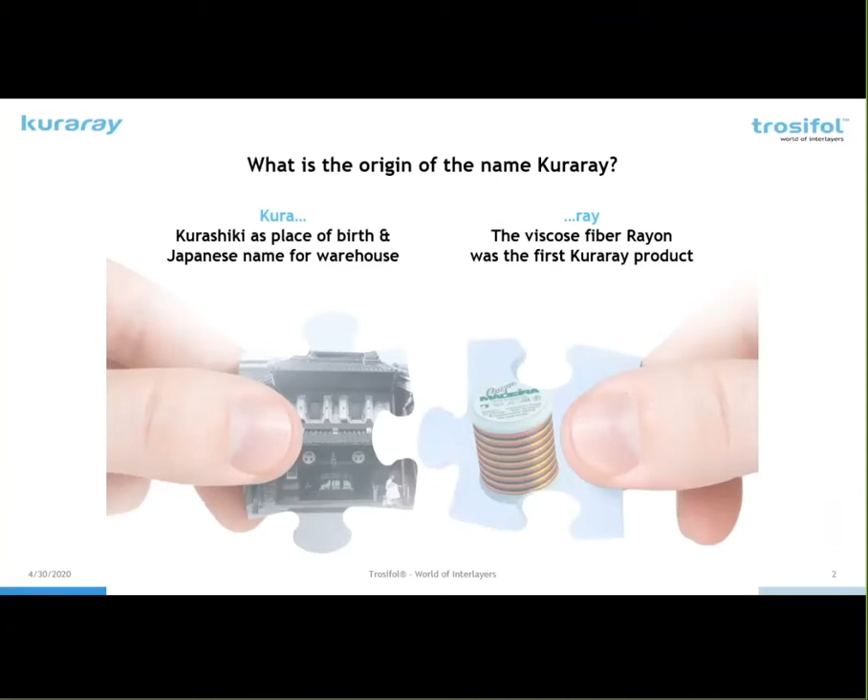So before we get into the part about the glass and the interlayers, let's talk about Kuraray itself, because a lot of people are not familiar with the company Kuraray. The company was founded in 1926 in Japan, and the origin of the name, the first four letters, the Kura, comes from Kurashiki, which is the area in Japan where the company was founded. The last three letters, Ray, that's for rayon, which came from the first product that Kuraray manufactured. So you put them together, you get Kuraray.

So Trosifol is the Kuraray interlayer business, and you can see how it evolved over time. Kuraray in 2004 bought the HT Troplast business, and that started their venture into interlayers, and that was their PVB business, and that's where the Trosifol name comes from. In 2014, so next month it's going to be 6 years, Kuraray purchased the DuPont GLS and vinyls business.

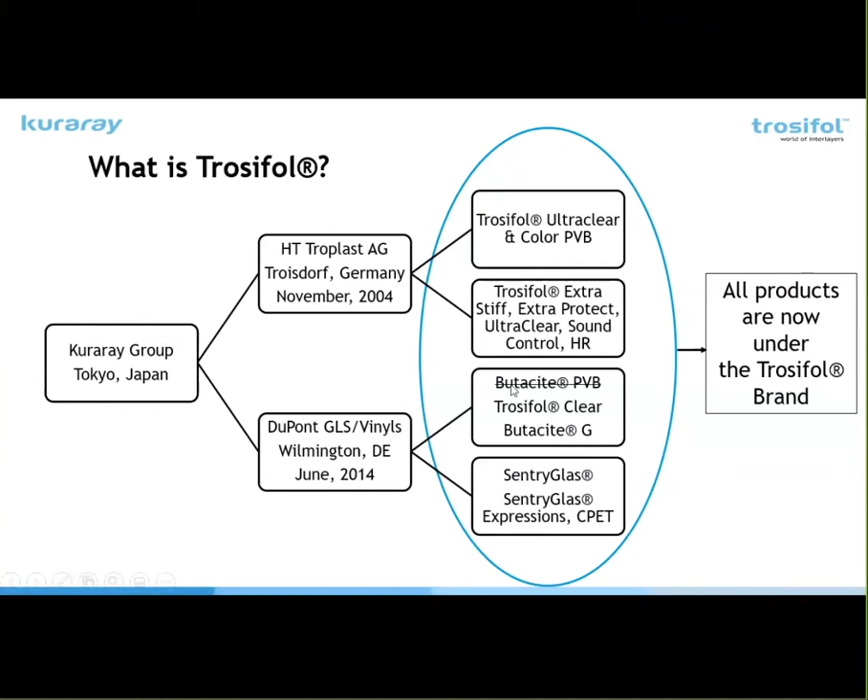And along with that came products such as Butacite PVB, as well as SentryGlas and SentryGlas Expressions, and the whole portfolio of the interlayers from DuPont. So now the whole thing is combined, and it's all under our Trosifol brand of products. The brand names are still the same. I have crossed out the Butacite because our PVB portfolio is now all called Trosifol.

So there are several applications that we'll be talking about today where laminated glass is used. First of all, we'll talk about some overhead applications such as canopies and skylights. You need laminated glass to reduce the risk of falling glass as well as fall through. Guardrails. Guardrails is a big topic these days as the codes have changed, and we'll spend a little bit of time on what's going on with the codes and standards for guardrails.

Security, both man-made and natural threats. We'll talk about natural threats through this presentation, and then at the end there's a little addendum where we'll get more into forced entry and man-made threats. Comfort, and in talking about comfort, I am referring to acoustics, so we'll talk about that. And then finally, aesthetics and durability. This would be some colors and printing on interlayer and edge stability concerns that may come up.

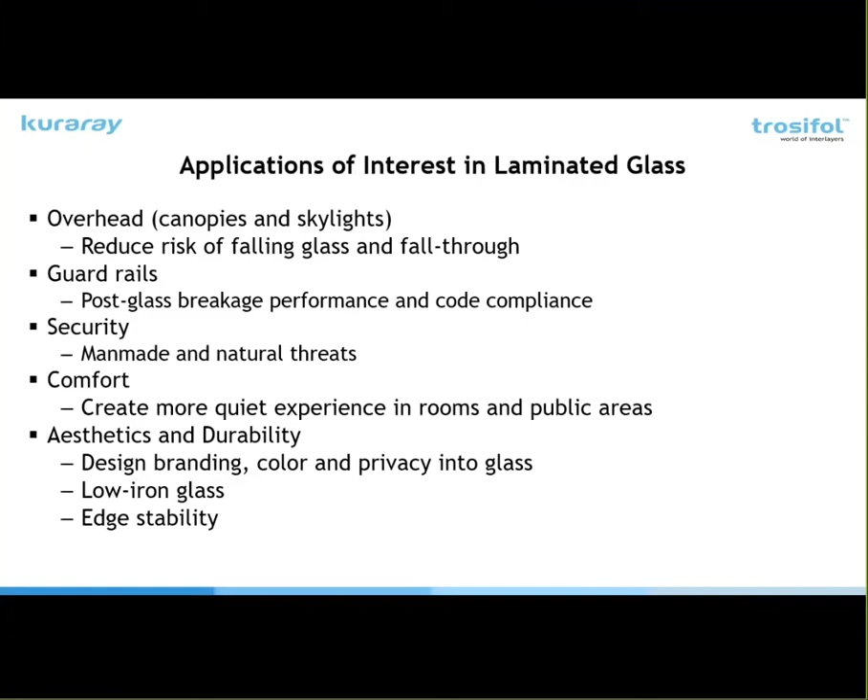So as far as laminated glass, I'm sure most of you know what laminated glass is, when you have at least two pieces of glass and at least one interlayer. The interlayer is there to retain the glass if breakage occurs. The types of laminated glass I'm going to talk about today are those made with PVB, or polyvinyl butyral, and ionoplast, which is the generic term for SentryGlas.

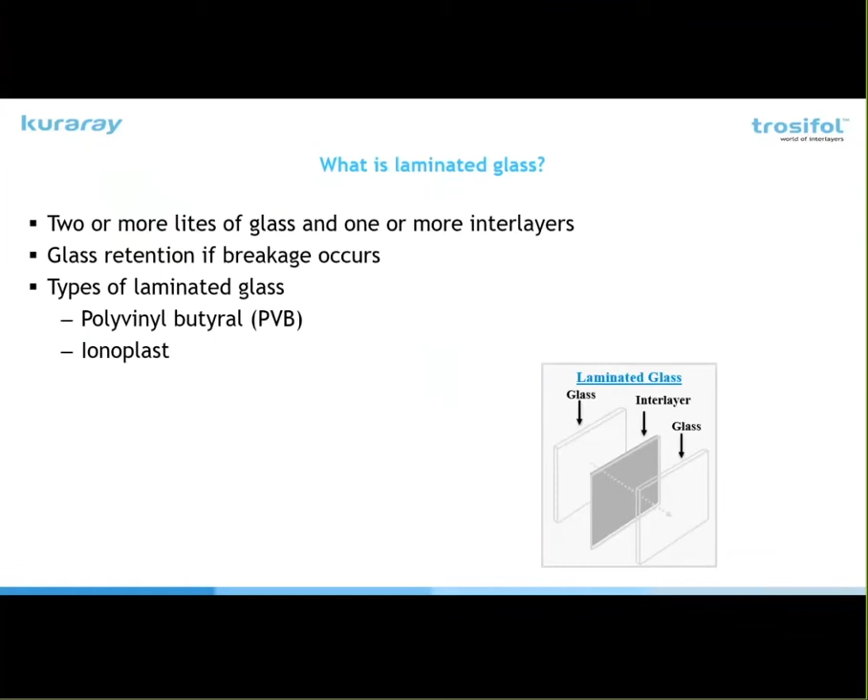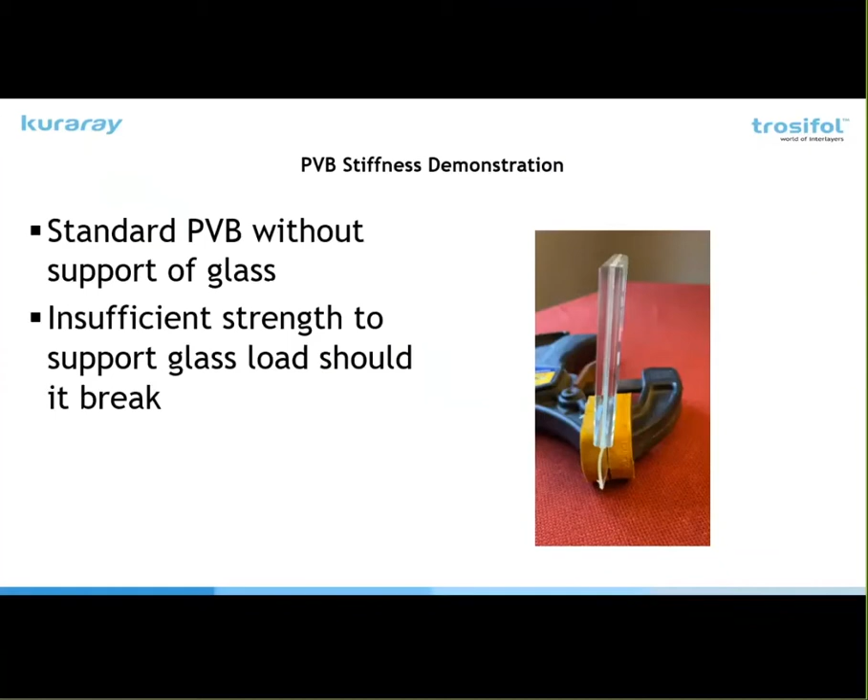Now, if I were doing this in person, I'd have samples that I could hand around and you can feel what the interlayer is actually like. You can see on the picture there, the interlayer is exposed on about the bottom inch of the sample. The rest is laminated with glass. So with PVB, it's a soft interlayer originally developed for the automotive industry in the 1930s. You can see if it's not supported by glass, the interlayer itself cannot support the structure. So it's not really a structural type interlayer.

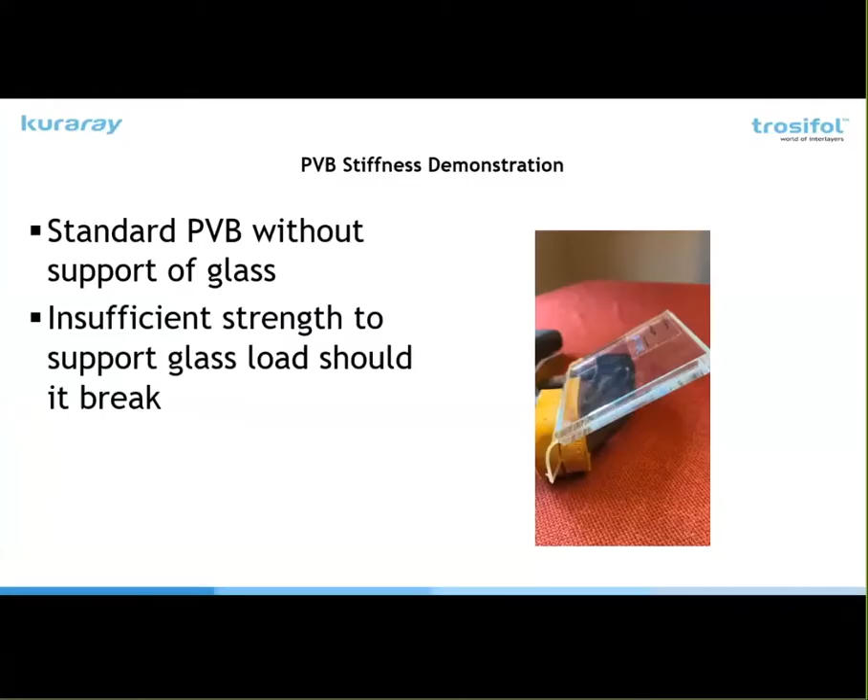Now with ionoplast, it was invented in the 1990s after Hurricane Andrew struck Florida, and it was developed initially for improved hurricane resistance and windblown debris resistance. So it's 100 times stiffer than PVB. It's got 5 times the tear strength, and it can maintain the load even without the reinforcement of the glass. So this may allow for thinner glass construction. That may be important if you're doing larger glass, because as you go larger, it gets heavier, and if you can reduce the thickness, that can help offset some of the weight.

So this is what it looks like with a SentryGlas interlayer. And you can see it stays up by itself. You can deflect it. It just returns to the same place. And you'll see more videos of actual glass breakage as we go along through the presentation. But that's just a little bit of background as far as getting some understanding of the differences between the interlayers.

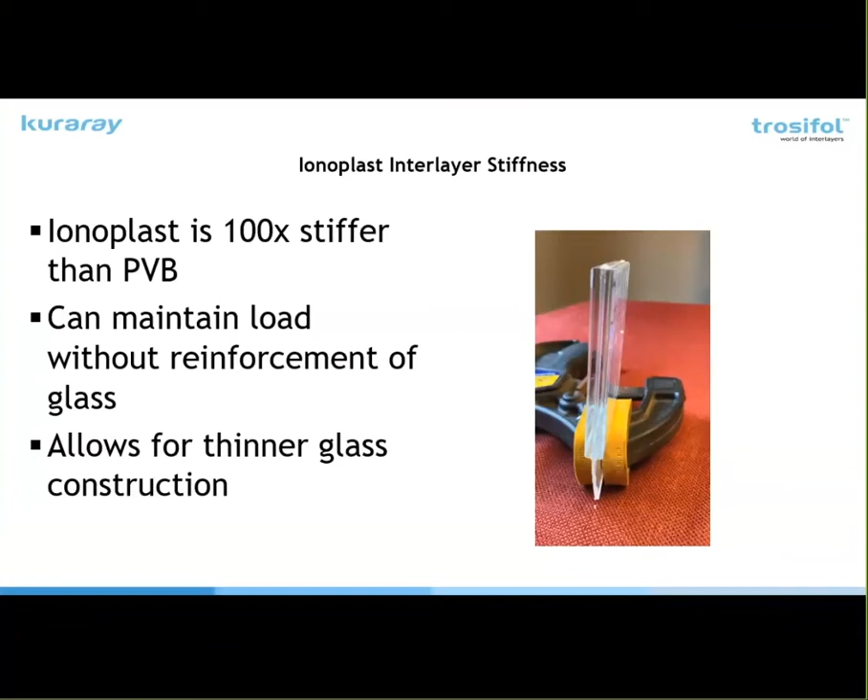As far as the codes, where you're going to find a lot of information, if you go to IBC Chapter 24, you'll find the overhead glazing information there. You'll find information on handrails and guards. It'll talk about safety glazing for shower enclosures and other hazardous locations. There's information about floors and elevators and so on.

One thing I do point out is that tempered glass is considered safety glazing. And in some applications, such as shower doors, you can use tempered glass. Other applications, like overhead applications and most handrail applications now, you have to use laminated glass. So both laminated and tempered are safety glazing. Heat-strengthened glass is not, and annealed glass is not safety glazing. It has to be laminated heat-strengthened or laminated annealed to meet those requirements.

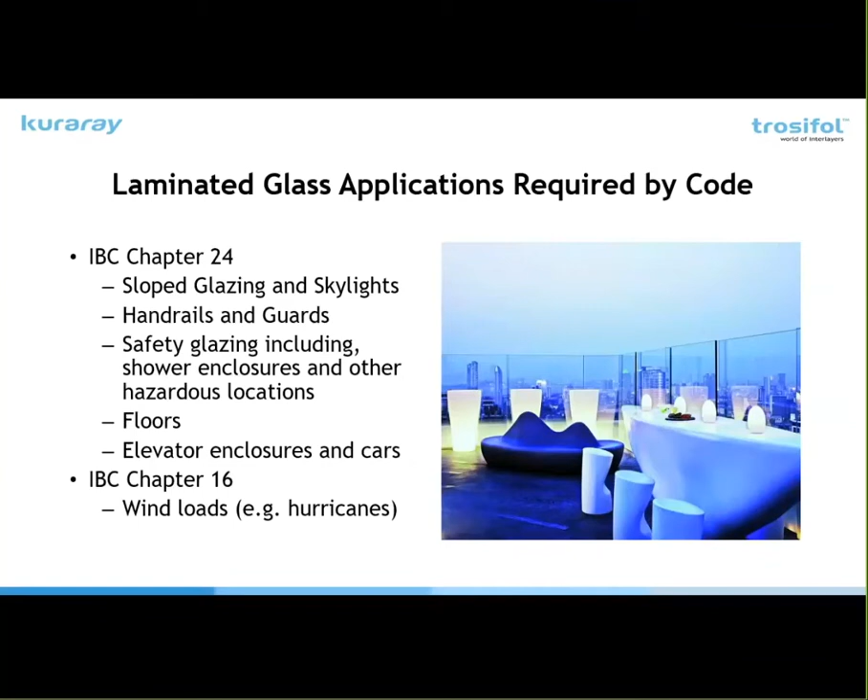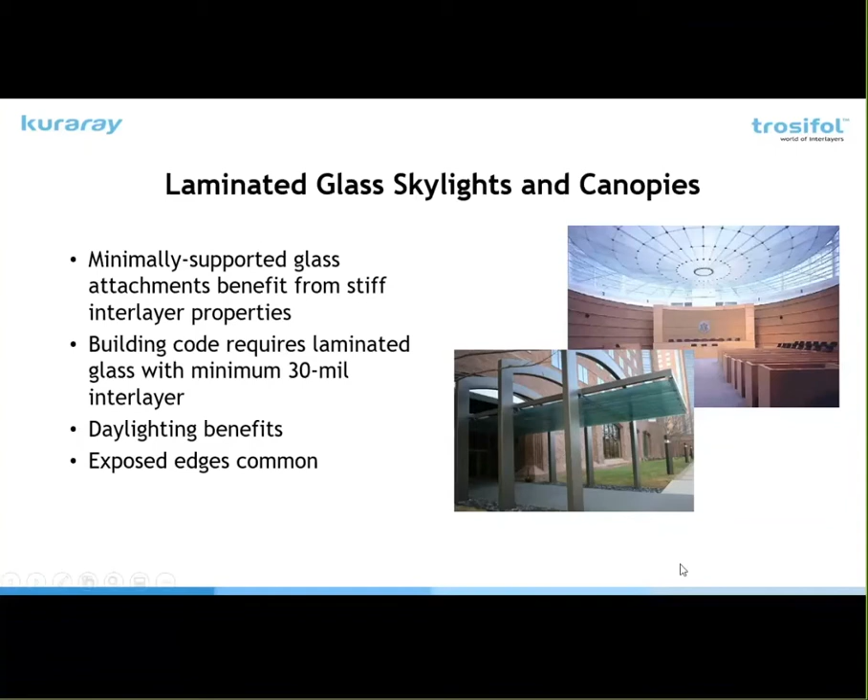As far as overhead is concerned, the codes call for a minimum 30 mil PVB interlayer. And the key word there is minimum, because in a lot of cases, when it's engineered, it won't meet the requirements. So in these two pictures here, you see large point-supported glass. That's in Phoenix. So with the heat, you may get some sagging, and you'd have to go thicker with the glass if you didn't have a stiff SentryGlas type interlayer. This is a good example where you have exposed edges and point support, and you'll see in the next chart and video what happens when you have that type of situation.

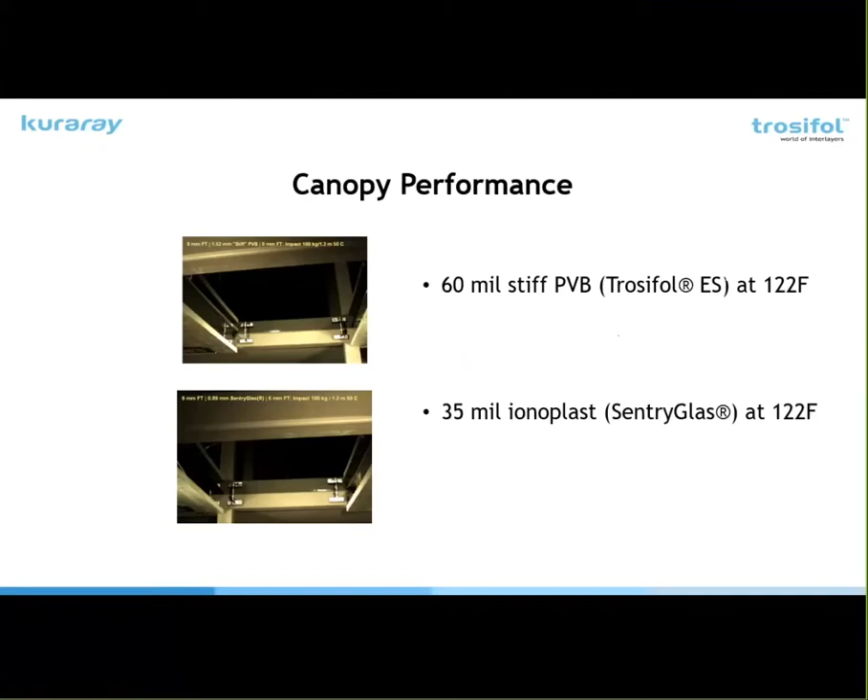What you'll see here is a stiff PVB, our Trosifol ES, and our SentryGlas, each being impacted with a falling object. It's 100 kilos or 220 pounds dropping from 4 feet. And this is your stiff PVB, and you can see how it tears from the point supports.

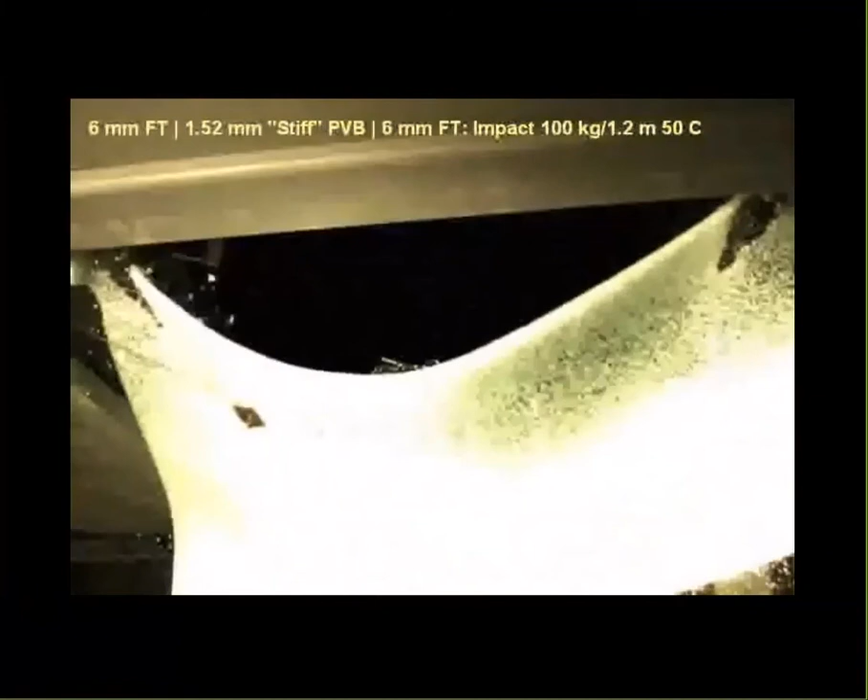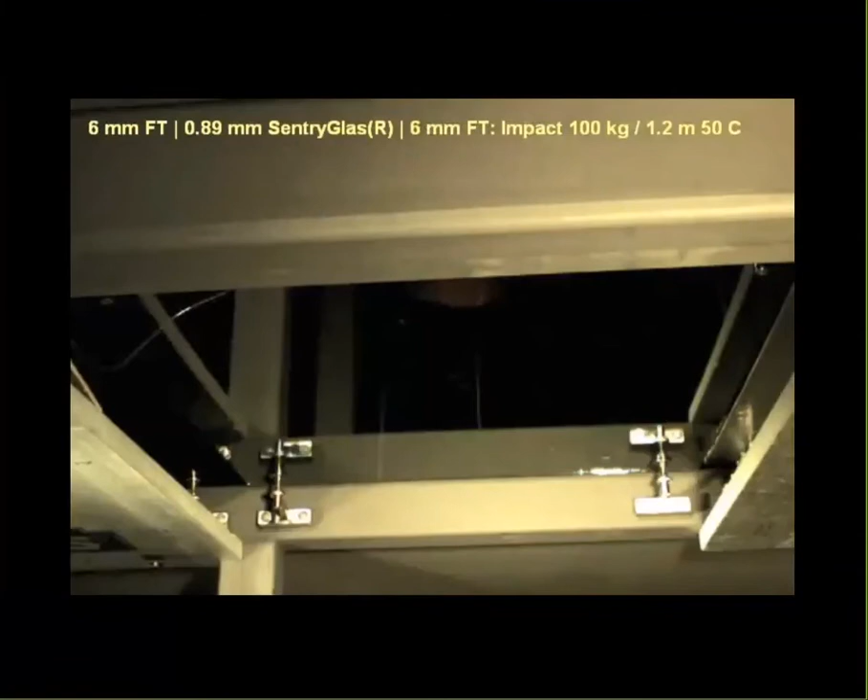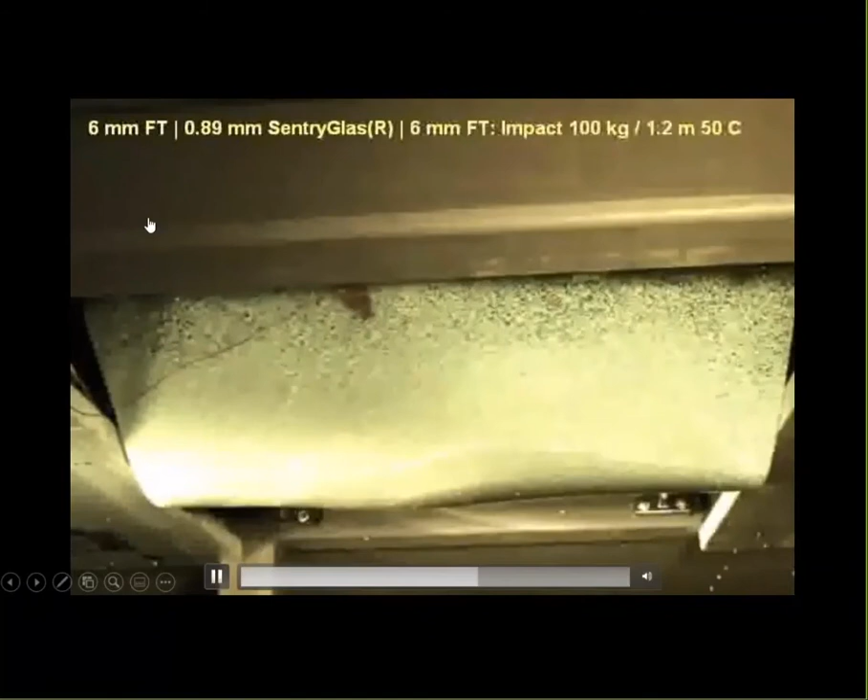And obviously that is not a safe situation. Now with the ionoplast, same type of test, and this is a thin ionoplast. It's only 35 mil, 0.89 millimeter, and it does not tear, it stays up. So let's say if a worker were on a canopy doing something and he tripped and fell, there is safety built into that type of system.

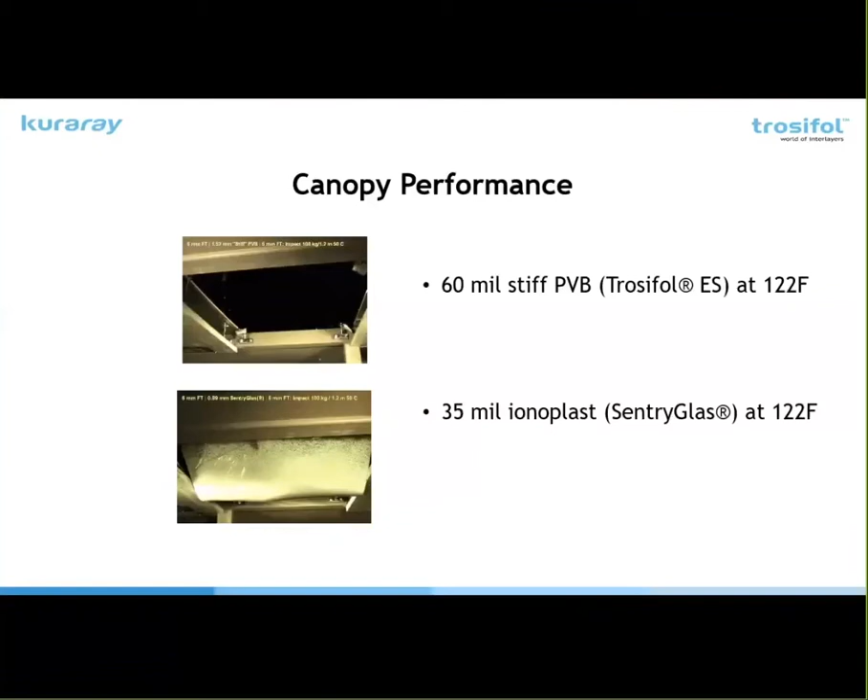Railings and guards. I mentioned earlier that there's been a lot of change in the standards over the past half dozen years or so with railings and guards. In IBC Chapter 24, it says glass used in handrail, guardrail, or guard section shall be laminated glass constructed of fully tempered or heat-strengthened glass. It used to be either laminated fully tempered or heat-strengthened, or you could use fully tempered glass.

There's an exception to that where you can use tempered glass if there's no walking surface below or if the walking surface is permanently protected. So if there's a canopy around the building, you may be able to use tempered glass because if the glass falls, it protects the people below. Personally, I don't like that exception because if the glass falls and you're the unfortunate person on the 20th floor, there's nothing protecting you from falling over. So I personally am not crazy about that exception.

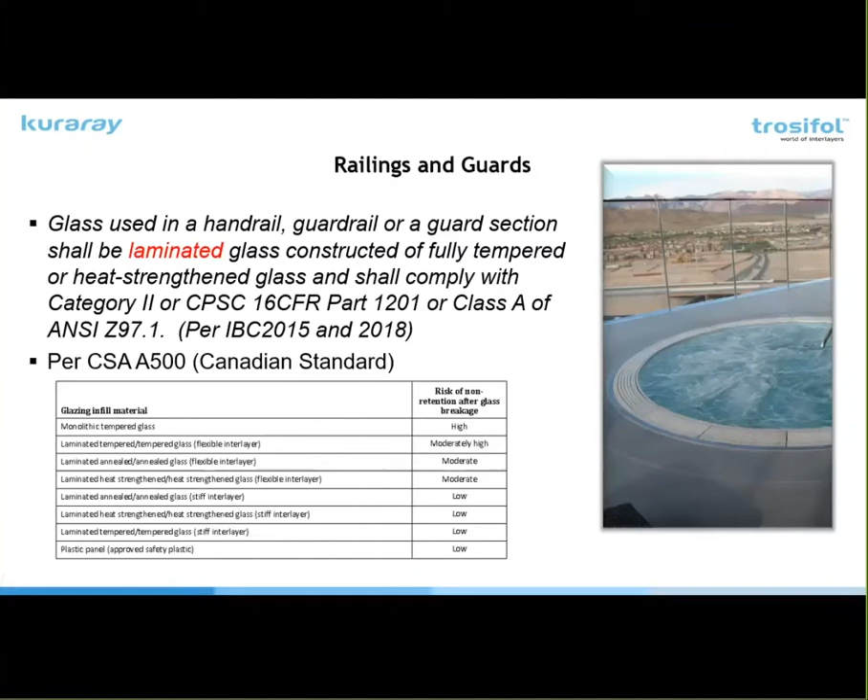Now, in the Canadian standard, CSA A500, which came out in 2016, they have a table in there that talks about the risk of non-retention after glass breakage. And you can see with tempered glass, it's a high risk. When you get a flexible interlayer like a standard PVB, you can see it only goes to a moderately high or moderate risk, and you'll see why in a minute. When you get a stiff interlayer, and the standard defines a stiff interlayer as something with a Young's modulus of over 300 megapascals, so a SentryGlas would fit into that category, it becomes low risk.

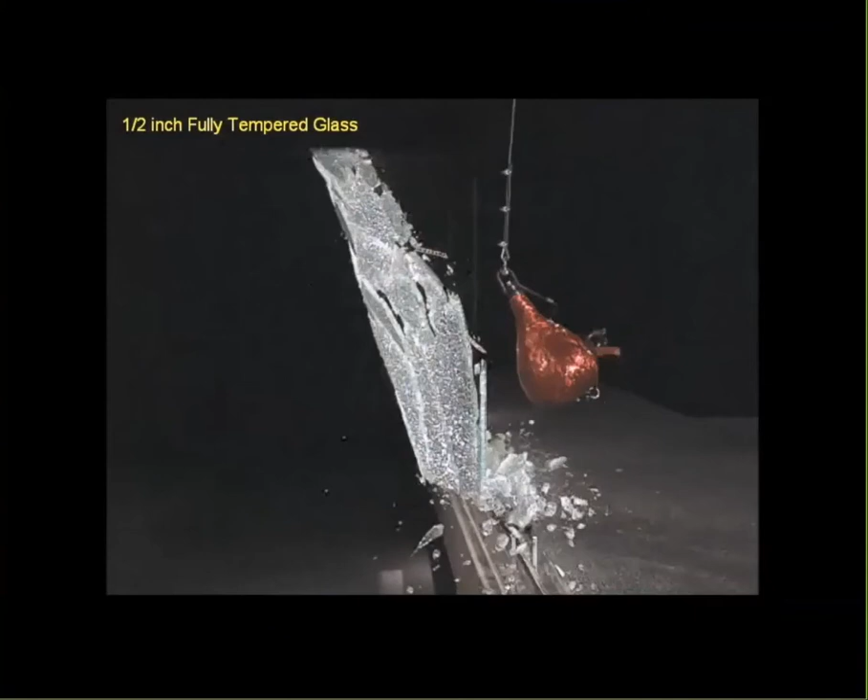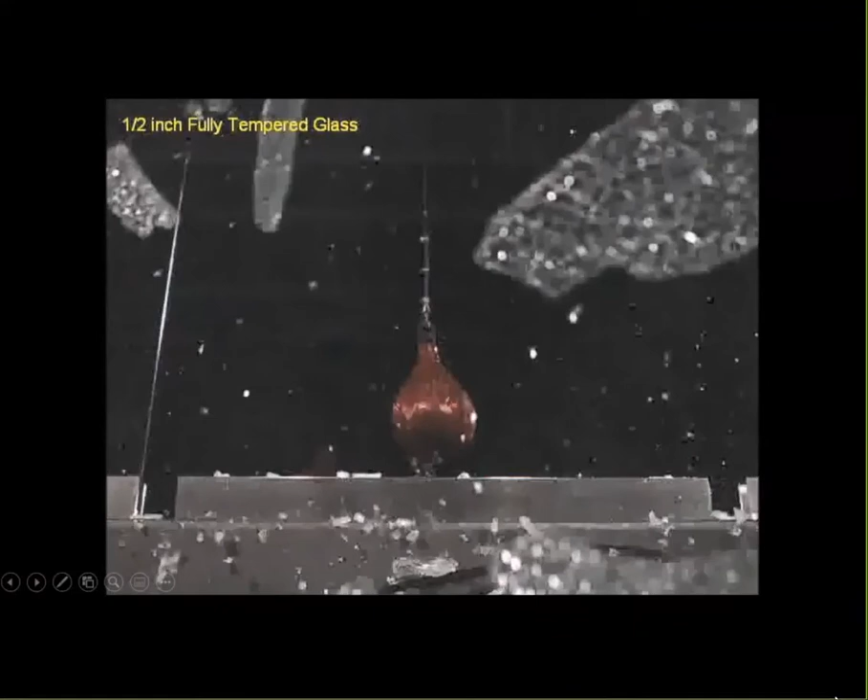So what does it look like? This is your half-inch tempered glass after impact. You see how it breaks. I think most of you are probably familiar with that. It's supposed to break into small pieces, and it does. But if you look at some of these big chunks that are agglomerated before it hits something else, if a half-inch piece of glass that size hit you on the head, it would not be pleasant. If you put film on it, it holds the glass together very well, but now you have one piece of glass falling. It's very dangerous.

Now, another thing has occurred going from IBC. I hear some feedback. Let me make sure everyone's muted. Okay.

So going from IBC 2015 to 2018, the change occurred in how you could install a railing without a metal cap or without a railing connecting three pieces of glass. In IBC 2015, if you wanted to install a system like that, it required building official approval. In IBC 2018, it requires the system to be tested and the glass to remain in place, and it goes by ASTM E2353.

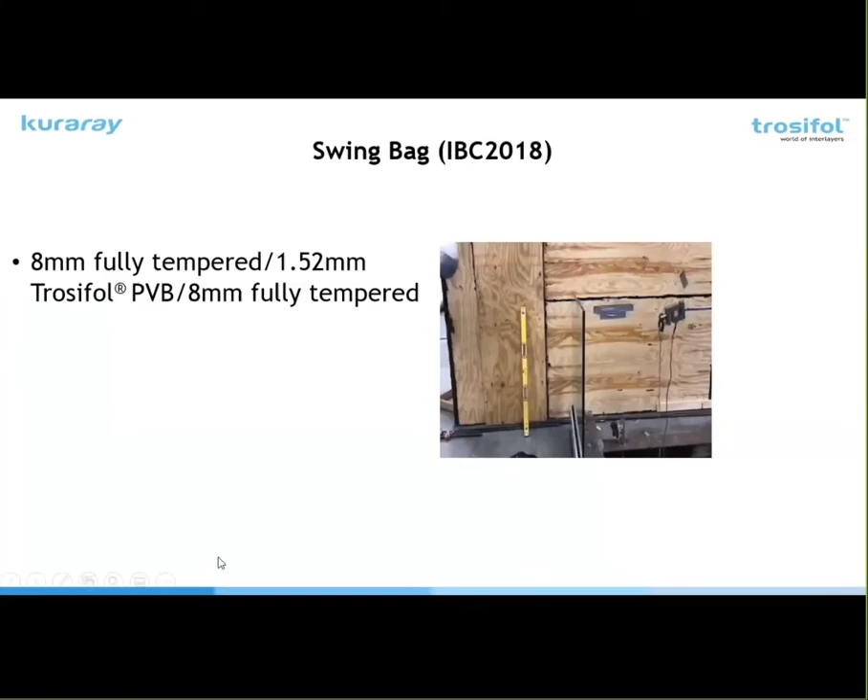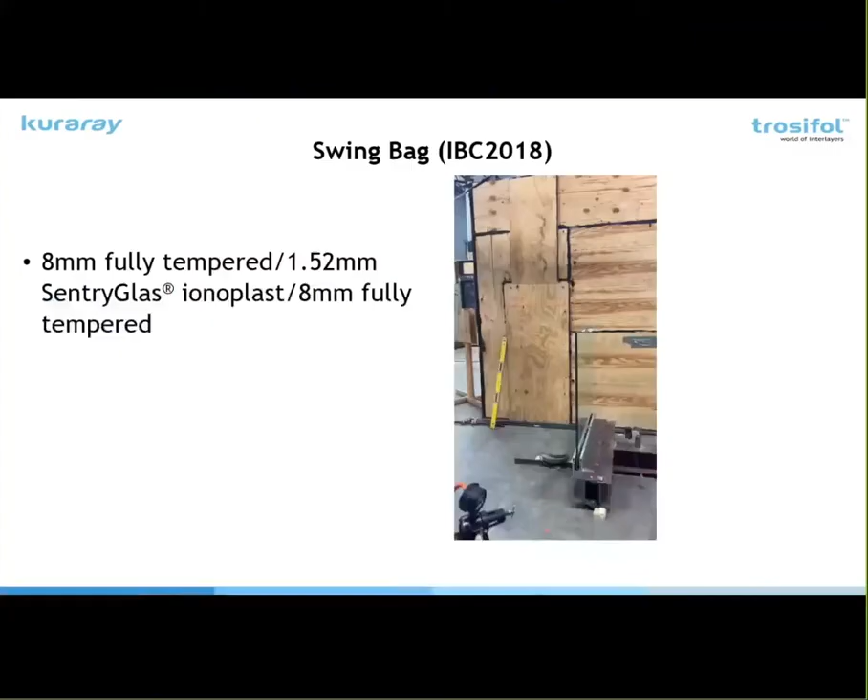So we've started doing some testing on the glass, and the previous videos were with 6 millimeter glass. This is 8 millimeter glass with the 60 thousandths Trosifol PVB, and after impact it does exactly the same thing that the thinner glass did. It falls over like a wet blanket. So then we've done it with SentryGlas, again with 8 millimeter glass. It's impacted and it did not break. We were pretty impressed by this.

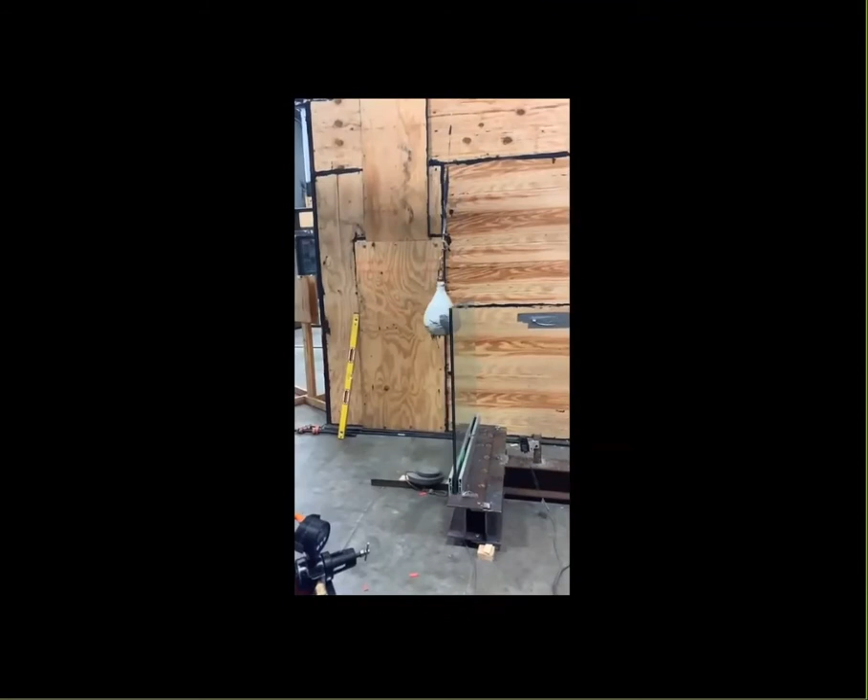Now, that being said, you can't go out and say, okay, I'm going to specify 8 millimeter glass and 60 mil SentryGlas interlayer, and I don't need building official approval. The railing supplier has to test the system, and the system has to pass. The reason being, there's a lot of torque when you impact that glass, and if the system isn't designed properly where it can fall out of the shoe, or if the anchors aren't long enough and the whole thing falls over, it all has to be tested. So someone like Jim Ellsworth may be a good resource to find out what the status of their system is for something like that.

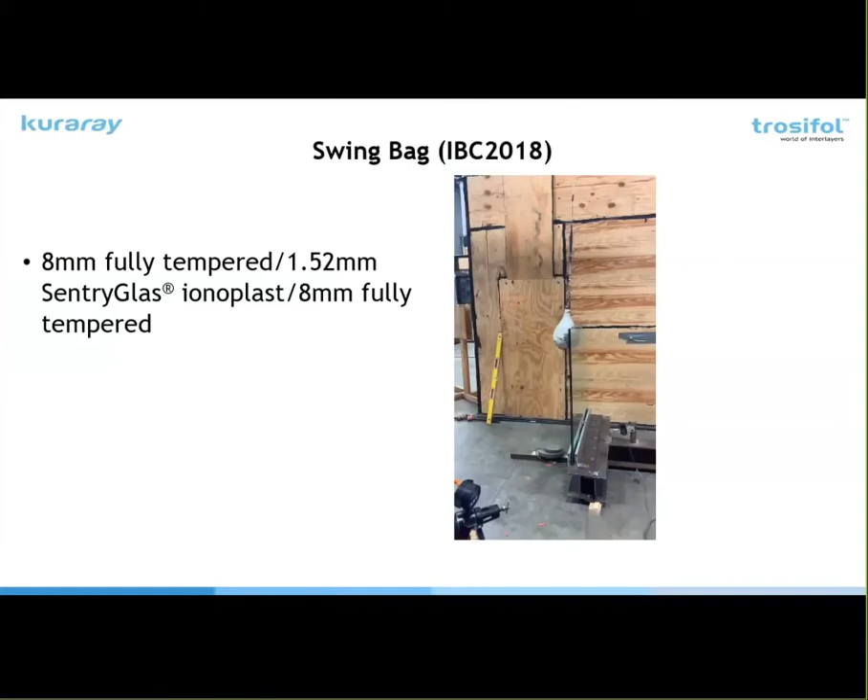Couple other things I like to point out when it comes to railings, because this comes up and architects bring this up, and I like to see glass get installed and everyone be happy with it. So ASTM C1172 is a standard for laminated glass, and in that standard there's a table that shows how much misalignment you can have for your glass, depending on thickness of glass and size. And in a typical railing type situation, you may have as much as 7/32 of an inch misalignment by the standard. Your clients will not be happy with that.

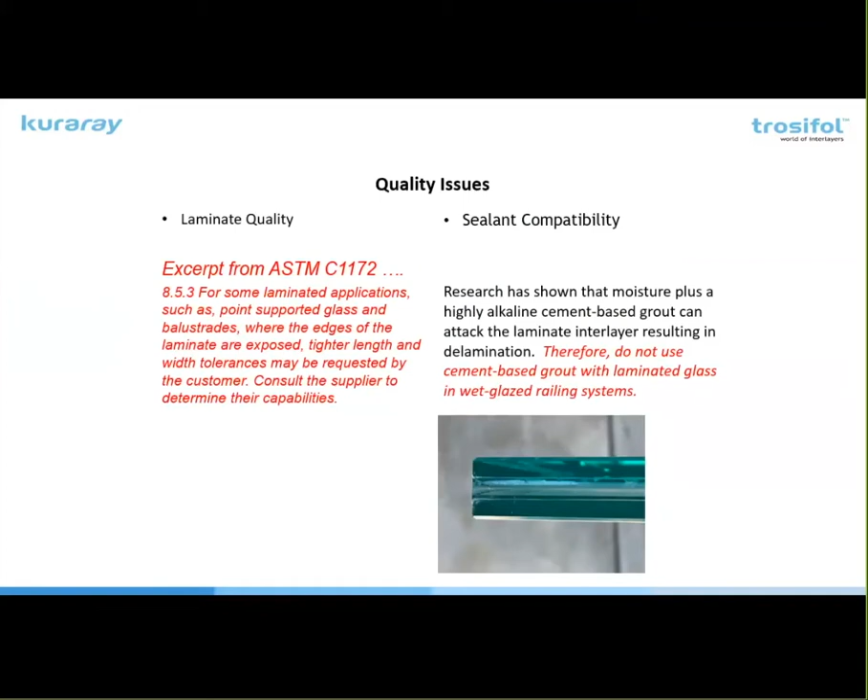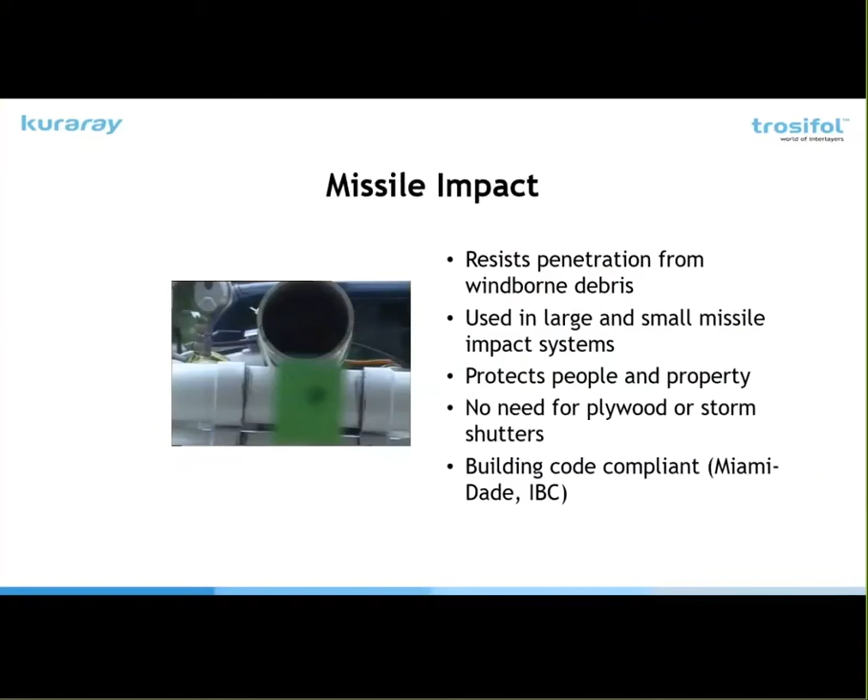Missile impact performance, this is important in areas with windborne debris. This is the reason SentryGlas was invented originally. So what you'll see here is a 9-pound 2x4 being shot at 50 feet per second or 34 miles per hour. The glass breaks, but it stays in place, and that's the objective. You want the glass to fill the opening. They'll pressure cycle this glass 9,000 times to make sure it stays there, because if the glass stays there, you avoid the damage on the inside of the building. You may have to replace a piece of glass, but by not having to remediate all the damage from water and wind getting into the building, you save a lot of money that way.

When you see a hurricane, everyone's out there putting up plywood and things like that. That's what you see on the news. But if you're building a high-rise or you have some sort of curtain wall system, you're not going to be boarding it up. So you need something built into it, and you've got to make sure that the systems have been tested and are compliant.

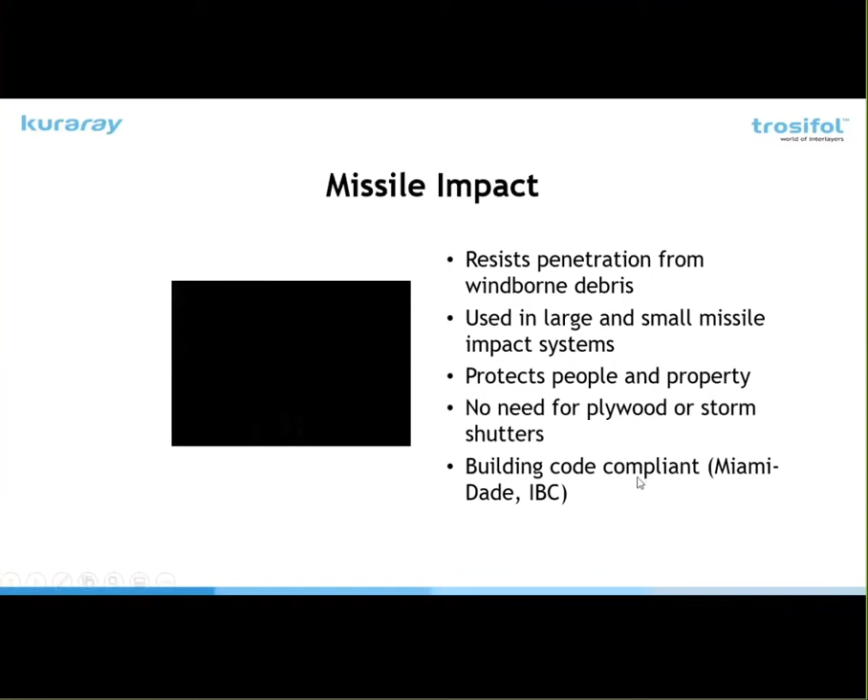One area that's coming up more and more in the past couple of years is acoustics and sound reduction, especially in areas with high population density. There are standards in New York. Toronto just adopted some, I think, in October of last year. It's becoming more of an issue, and laminated glass helps reduce sound from one side to the other. As a matter of fact, now we're going completely opposite of some of the things we've just seen. Instead of a structural type system, you're looking for something softer. And there are specially formulated PVBs available that are better than standard PVBs, and that will help improve your acoustics.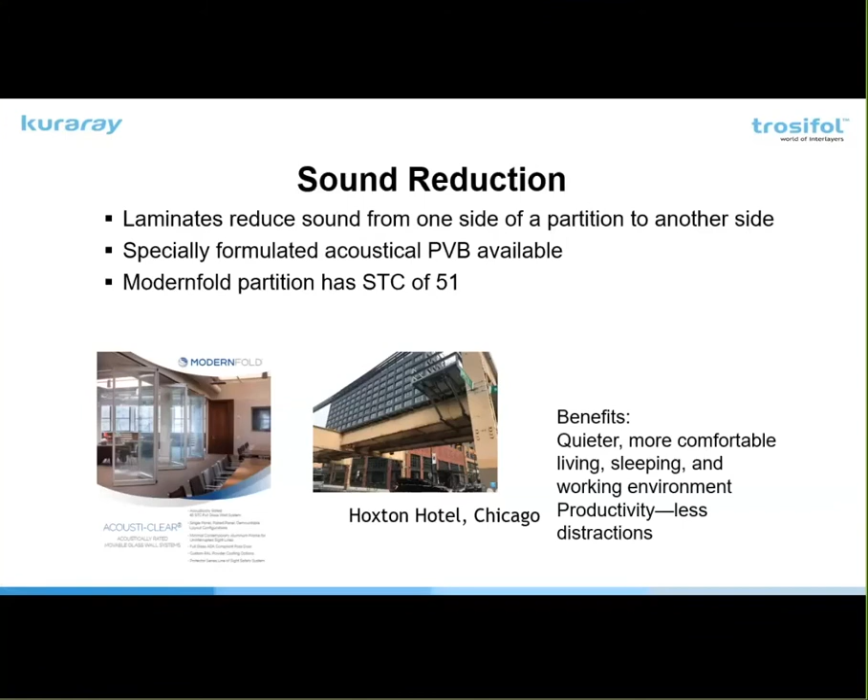So this is what your thought process may be when you're designing some acoustic glass. You can look at a monolithic piece of 10 millimeter glass and get an STC rating of about 33. Now, if you put in laminated glass with two 5 millimeter pieces of glass and a standard PVB, you could increase that performance to a 35. If you put in a laminated glass with an acoustic PVB and the 5 millimeter glass, you can go up to 38. So you go 5 points from a monolithic glass to an acoustic PVB.

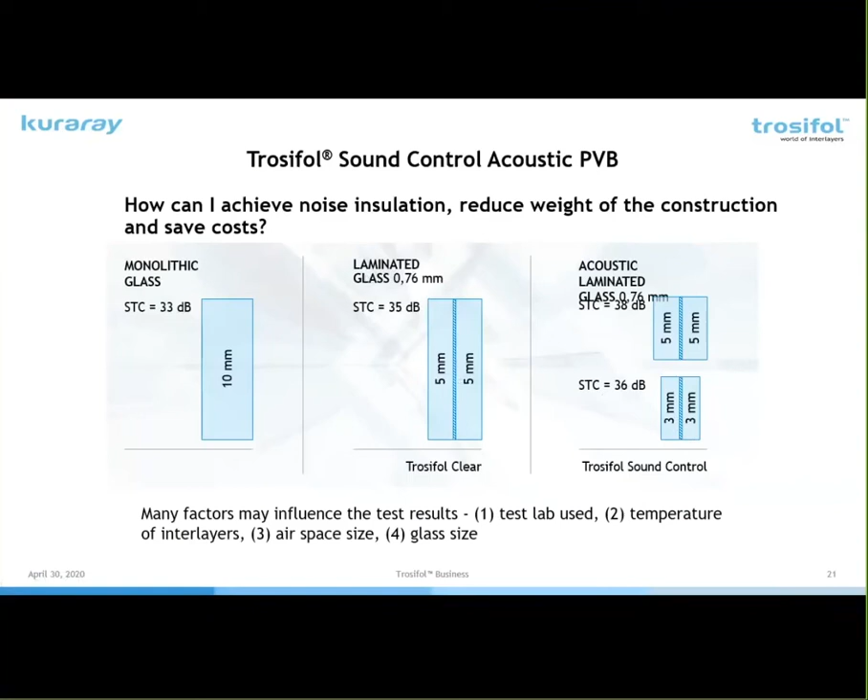Well, let's say you don't need all of that performance and you're getting a little bit thicker than you'd like to be. You can get better performance by going a little bit thinner on the glass, 3 millimeter glass with the acoustic PVB versus a standard PVB. So there's different options you can go through. If you have questions about that, we can consult with you on it. We have an app that you can put on your phone that will help you select types of glass construction to meet acoustic ratings.

So why does this happen? Basically, in glass, there's a coincidence dip. And the coincidence dip is determined by taking the thickness of the glass and dividing that into 12,500, and you'll see where the coincidence dip is. So this is actually for 10 millimeter glass. You can see the coincidence dip is right around 1250 hertz. And you can see most of the area, it's pretty close, except here.

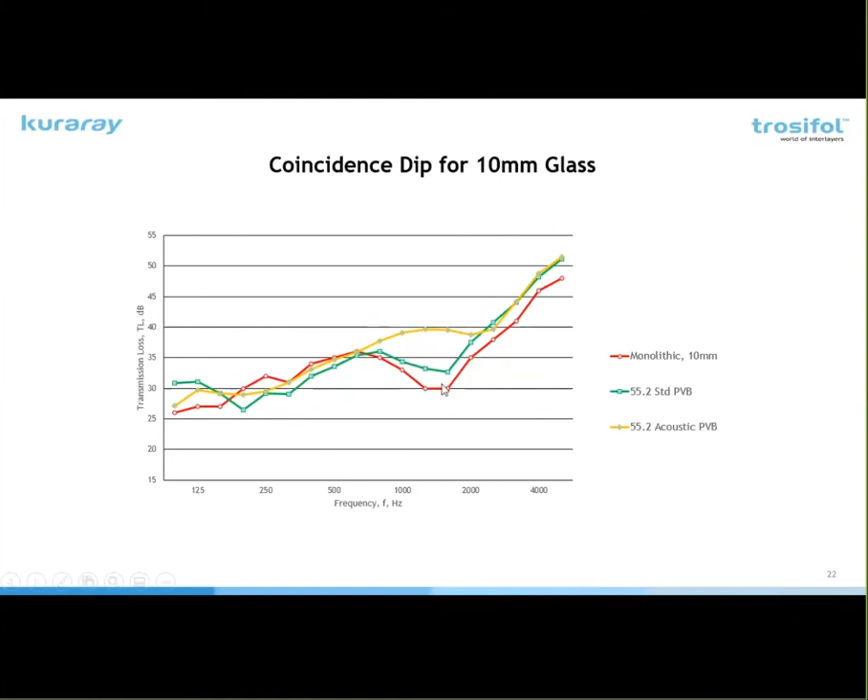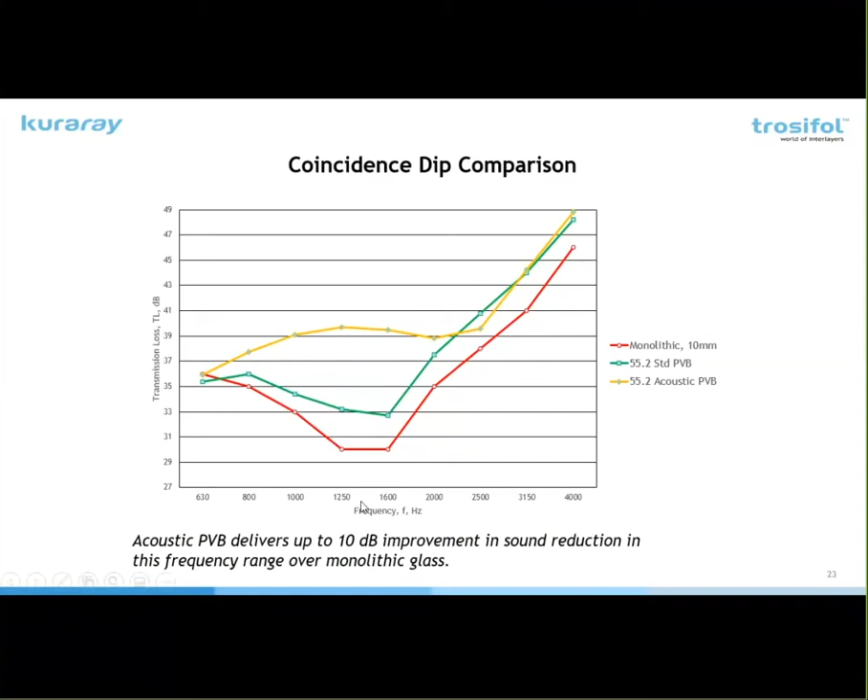So I showed you the picture of the Hoxton Hotel; you saw the outside. This is from the inside. I stayed there last year, and it's right on the L. And if anyone has ever been in Chicago and seen the L, it kind of sounds like this.

Yep, let me restart that. There we go.

Obviously, with the window open, you're going to get pretty much all the sound, but you close the window, and you've got a room where it's quite comfortable to sleep. There's still a little bit of low frequency sound that comes in. With the low frequency sound, you can accomplish more reduction if you increase the mass of the glass, but it's very effective in reducing the sound and making for a quiet and comfortable environment.

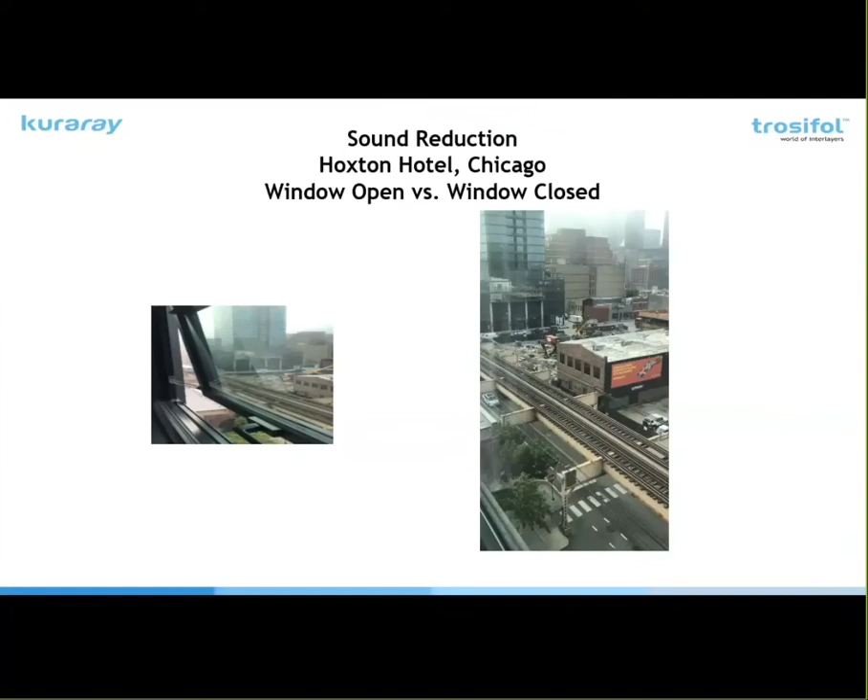Colors. Colors comes up quite often. Trosifol has many different colors. We have decorative colors and the standard architectural colors. An area where we have somewhat of a unique product offering is in our opaque colors. We have an opaque white and an opaque black. The opaque white is outstanding if, let's say, you had a conference room and you wanted a writing surface but didn't want anyone to see any read-through from the other side. It's an excellent material for that. It can be used in partitions or barn doors.

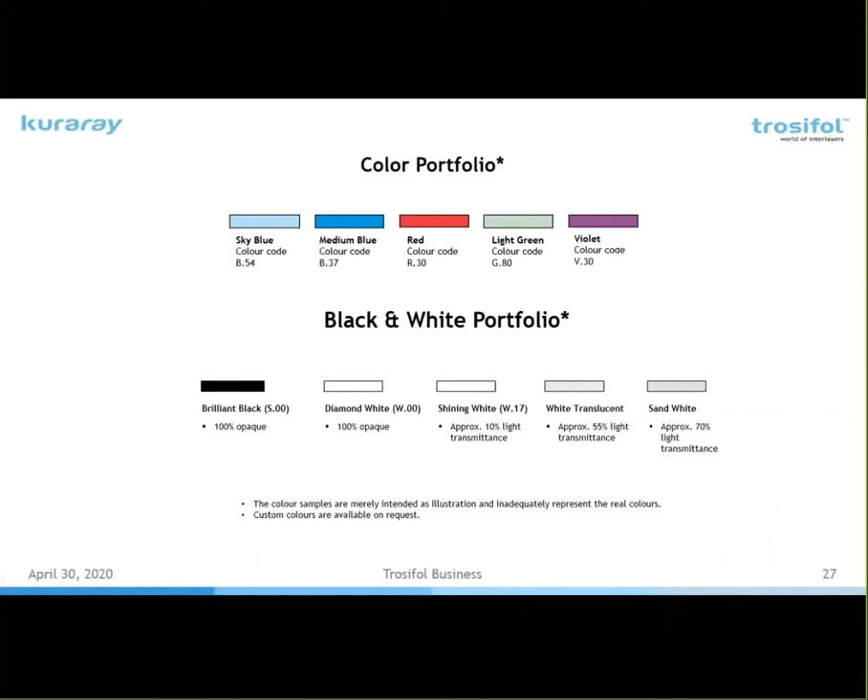Now, there is PVB that is ultra clear also. It's our Trosifol UltraClear product. It's almost as clear as SentryGlas. So if there are no structural requirements, if it's a pretty much standard storefront captured type application where you're using low iron glass, using Trosifol UltraClear would maintain that appearance that you want to achieve with the low iron glass.

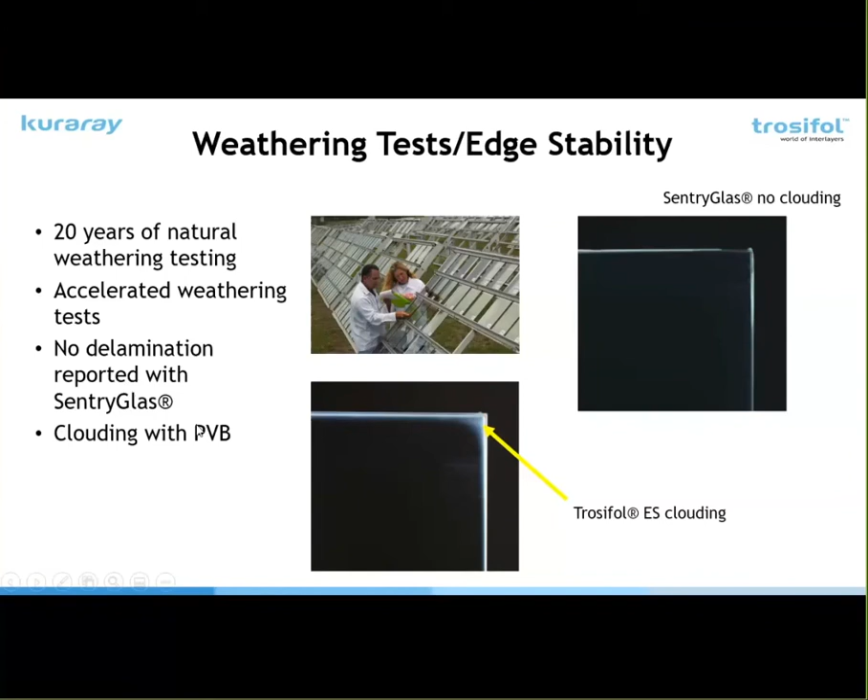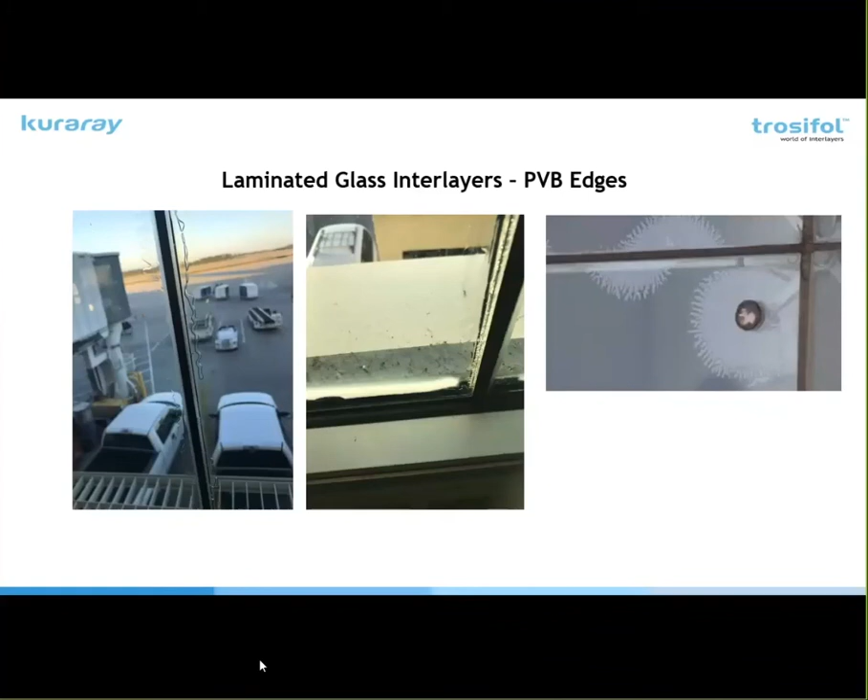We're global. We have technical support in all regions and sales support. And as I mentioned earlier, there are apps available for your phone. There's one on structural. You can do some glass calculations on your own. If you're trying to figure out what you want in your railing, you can get pretty darn close to it with the app. We have one for the sound control, and there's also one for light.

I got another comment here. What about exposed vinyl in an interior setting to reduce echo? That would be like a film on the glass. We really don't do that in our portfolio. I don't know if someone else would have something like that, but that's not something that we would offer. Typically, you wouldn't have a PVB exposed. It's just too soft. It would get damaged, it would get dirty, and you wouldn't be able to clean it very well. There's some other products. We have a film that could be laminated on. It's a hard coat polyester, but I don't think that would have a big impact on the acoustics.

We've been through a lot of background about the interlayer, and we get back to where we started, and that's how do you select the appropriate interlayer for a given application. So it starts out, is it going to be outside or inside? And from a Kuraray perspective, if it's outside and it's exposed edges, we're always going to recommend a SentryGlas or a SentryGlas Translucent White. It is available in translucent white, which is quite popular for things like canopies and partitions. I know Greco uses it quite a bit in partitions.

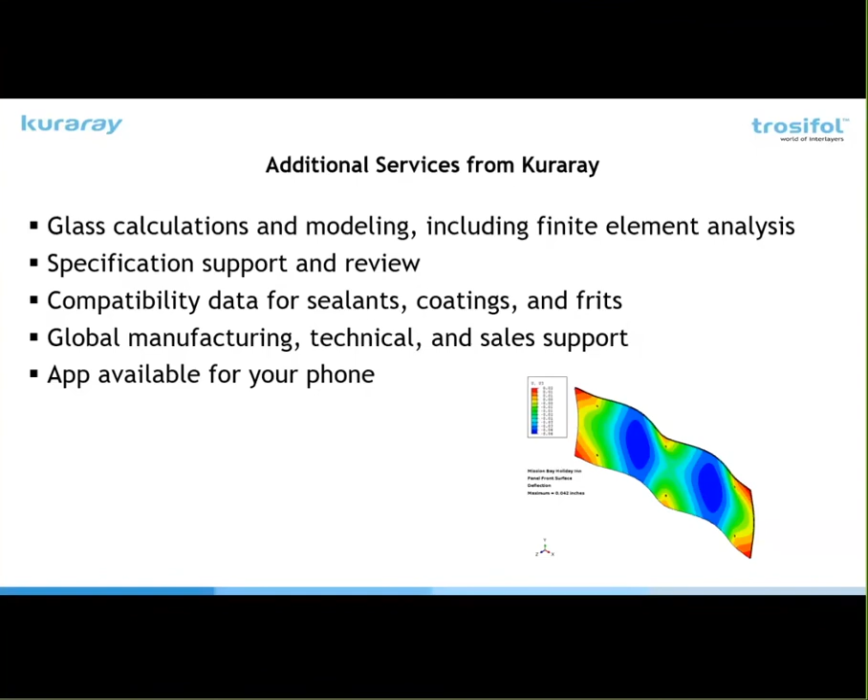I mentioned earlier when we were looking at the forced entry that we'd go into a little more detail towards the end. It's a little addendum to the presentation, because security has come up quite a bit. It's come up certainly in the United States a fair amount around schools. We get questions around embassies, things like that. And so we've been doing a fair amount of testing in the past couple of years.

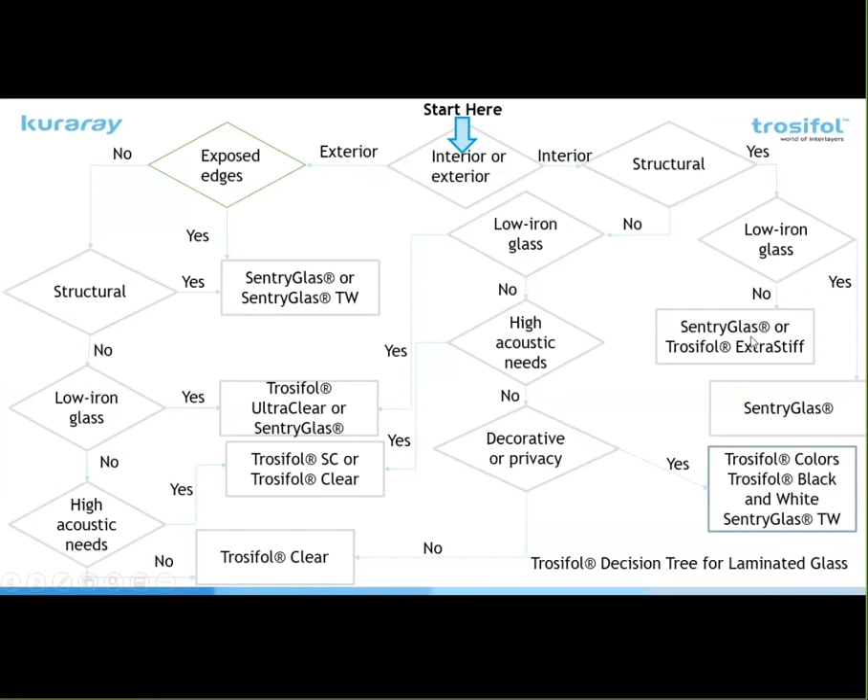So on the ASTM F1233, I pointed out the propane torch because of this. When you went to 270 mil SentryGlas, this actually made it through the propane torch in the first round, and then got to the third test protocol on the second round. So you can design some glass that has a lot of forced entry and intrusion resistance capability. Again, the key is, what does the client want? What are their needs?

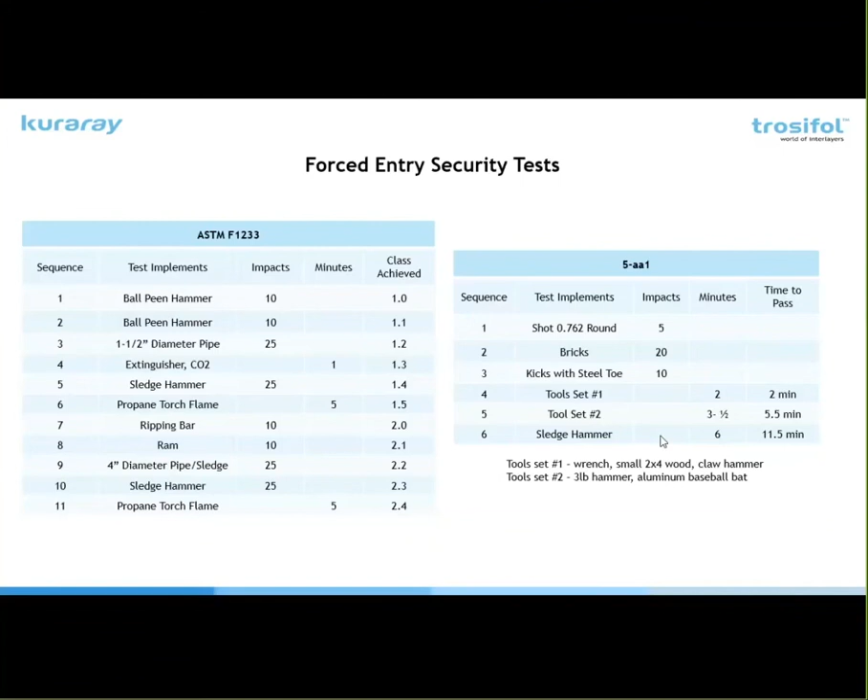Let's see, what restrictions are there when using a frit pattern and SentryGlas on the number 2 surface? SentryGlas actually adheres quite well to frit. There have been projects where SentryGlas has been used on 100% frit coverage, so that isn't a concern.

The other thing that we've just introduced in the past year is our SentryGlas Xtra. It's the next generation SentryGlas. It is called SGX. That one we actually got a trademark on. We never got a trademark on SGP, so we call it SentryGlas. But SGX has very good adhesion to the air side of glass as well as the tin side. So if there are any concerns about adhering to the air side, you could specify using the SGX material, the SentryGlas Xtra.